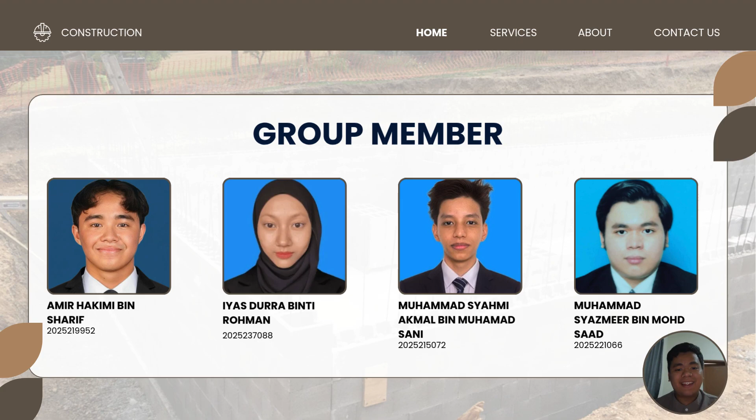Throughout this presentation, each member will present different sections of the report, including the project background, case study analysis, comparative analysis, and the key findings and recommendations.

Before we begin with the case studies, let us first understand the importance of basement construction in today's construction industry. Due to rapid urbanization and limited availability of land, basement construction has become an effective solution for maximizing land use, especially in densely developed areas.

By building below ground level, additional space can be created for parking, plant rooms, storage, and other building services without increasing the building footprint. However, basement construction is more complex than conventional construction. It requires careful planning, deep excavation, effective retaining structures, and proper groundwater control to ensure the safety and stability of excavation, hence improving the overall construction of the basement.

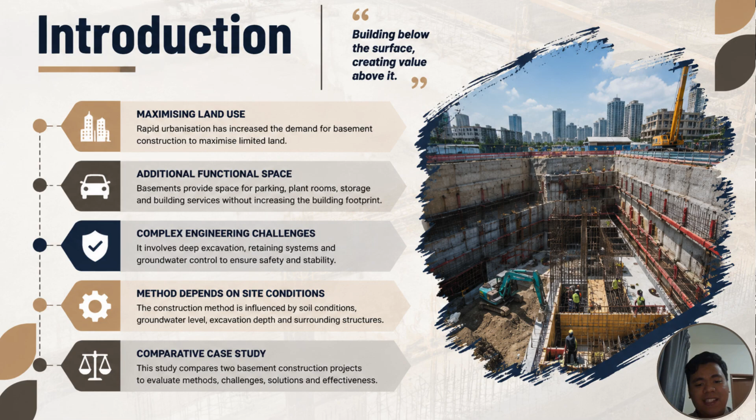Since every project has a different soil condition, groundwater level, surrounding environment, and selection of construction method, the choice of construction method must be based on the site-specific condition. Therefore, in this case study, we compare two different basement construction projects to evaluate their construction methods, engineering challenges, solutions, and overall effectiveness in achieving safe and efficient basement construction.

Now let's move on to the next part. Let's have a look at the project background of the chosen project. Let's dive into our first project breakdown of our selected case study.

The first selected project is the construction of one unit of a two-story detached bungalow with a basement, located at Lot 1823 Jalan Pegoh, Kampung Pegoh, Mukim Pegoh, Alor Gajah, Melaka. This project is designed as a modern luxury residential development consisting of one basement, a ground floor, and first floor, with a total gross floor area of approximately 3,196 square meters.

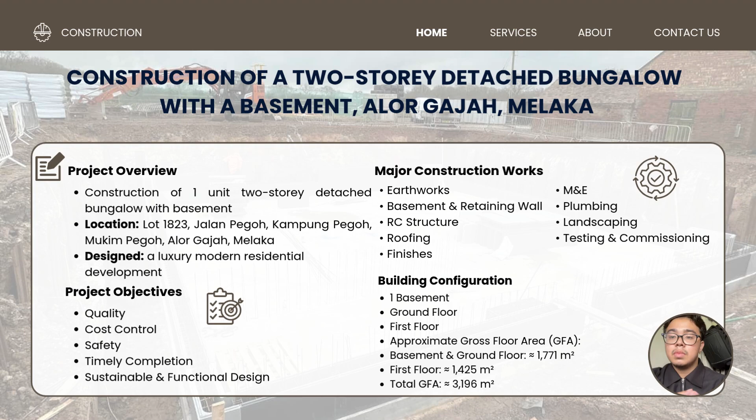The major construction works include earthwork, basement and retaining wall construction, reinforced concrete structural work, roofing, architecture, finishing, mechanical and electrical services, plumbing, landscape, and lastly testing and commissioning. The main objectives of this project are to achieve construction quality, effective cost control, workplace safety, timely project completion, and a sustainable and functional building design for our environment.

Next, I will briefly explain the parties involved in this project. Firstly, the owner, the client Dato Hashim Ghani, is responsible for initiating the project, approving the design, providing the financing, and making key project decisions.

Next, the architect, Azri Design Architect, prepares the architectural design, coordinates consultants, and ensures design compliance throughout construction. The quantity surveyor, ARR QS Consultancy Sdn Bhd, manages the project cost, prepares the contract documentation, and controls the project budget. Finally, the main contractor is Fuma Building and Engineering Sdn Bhd.

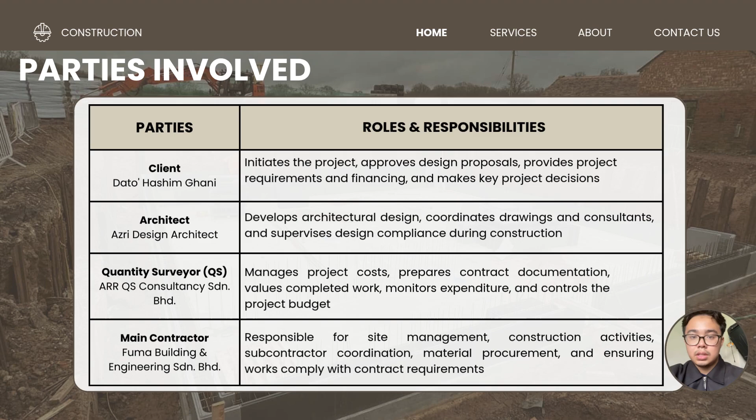They are responsible for managing the construction activity, supervising subcontractors, procuring material, and ensuring that all work complies with the contract requirements.

Now I will explain about the basement construction of Colony by Infinitum. It's a mixed-use development located in Chow Kit, Kuala Lumpur, near the Central Business District. The project was developed by Macly Equity Sdn Bhd in collaboration with Roxy Pacific Holding Limited.

It was constructed between 2015 to 2021. It consists of a 56-story tower with 723 residential units and 31 commercial units. One of the key features of this development is the 4-story basement.

The site is located in a highly urbanized area surrounded by existing buildings, commercial development, and major roads. Because of this, the construction process requires careful planning to minimize disturbance to the surrounding environment.

One of the major engineering challenges of this project was the geological condition of the site. The area is underlain by Kuala Lumpur limestone, also known as karst formation, which has irregular rock surfaces, underground cavities, and fractured bedrock. This condition made excavation and temporary retaining work more difficult compared to normal soil conditions.

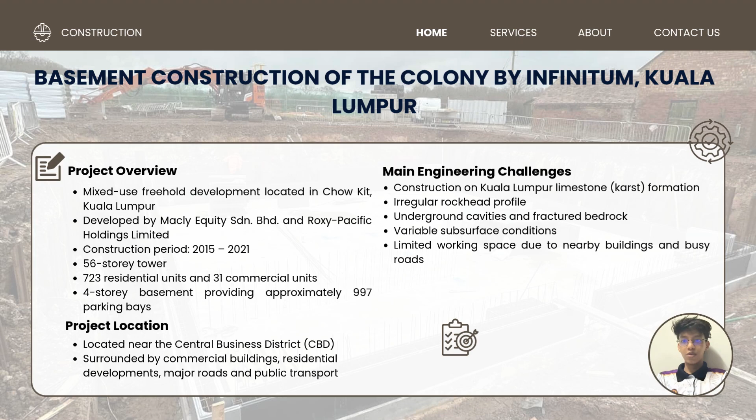In addition, the tight urban setting increased the complexity of the project, as the structure had to ensure the stability of the excavation and prevent ground movement that could affect the nearby structures.

Next, this slide explains the main parties involved in the construction of Colony by Infinitum basement project and their responsibilities. The client for this project is Macly Equity Sdn Bhd. They were responsible for project financing, defining the project objectives, appointing consultants and the main contractor, approving design proposals, and making key decisions regarding scope, cost, and program.

The main contractor is Prestij Mega Construction Sdn Bhd. They were responsible for managing the overall construction work on site, coordinating the subcontractors, and ensuring that all work was carried out according to the approved drawings.

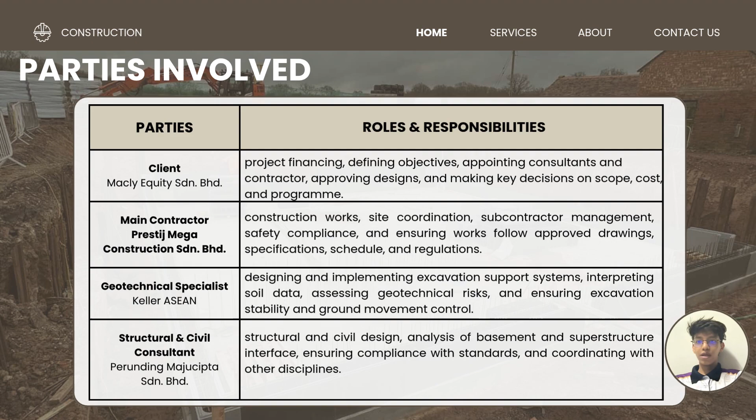Next is the geotechnical specialist, Keller ASEAN, responsible for designing and implementing the excavation support system, soil investigation, and ensuring the stability of the excavation work. After that, the structural and civil consultant was Perunding Majucipta Sdn Bhd, responsible for the structural and civil design, particularly the interface between the basement and superstructure. Overall, these parties worked together to ensure the project was delivered safely, efficiently, and in accordance with design and regulation requirements. Now I will continue with section 4, the case study analysis of our selected project.

Firstly, let's look at the design consideration. The building design was influenced by several important factors, including financial, space planning, structural requirement, site condition, and environmental performance, and compliance with Malaysian building regulations. Since the project includes a basement, the structural design used a reinforced concrete system to provide sufficient strength and stability. In addition, the hilly terrain and rural location require careful earthwork planning, drainage design, and construction logistics to ensure the building could be constructed safely and efficiently.

Let's continue with the basement construction method. This project adopted the open cut excavation method, which is suitable because the site has sufficient working space and relatively stable soil condition.

The construction begins with site clearing and site setting out, followed by soil stripping to remove unstable topsoil. Excavation is then carried out progressively in stages until the required basement level is achieved. To maintain excavation stability, batter slopes formed based on soil condition and continuous inspection are carried out throughout the excavation process. Instead of using a full internal strutting system, this project relies on batter slope for stability. However, temporary support such as steel sheet pile or timber planking are provided in localized areas whenever additional support is required.

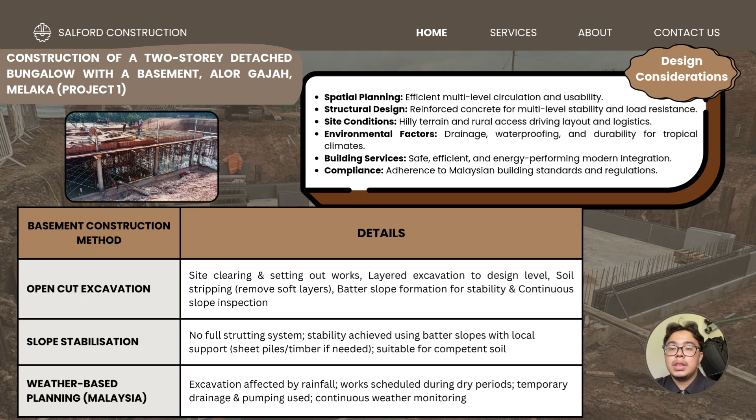Moving on to material use, the main structural material is reinforced concrete, used for the basement slab and retaining wall due to its high strength and durability against earth pressure. A waterproofing system is also installed to prevent water leaking and protect the basement from moisture damage.

During excavation, timber and steel supports are used temporarily whenever additional lateral support is required. For construction equipment and machinery, excavators are used for earthwork and material handling, while a hydraulic piling machine is selected because it produces less noise and vibration compared to conventional piling methods. A water pumping system is also used to control water inside the excavation area, ensuring a dry and stable working platform throughout the construction process.

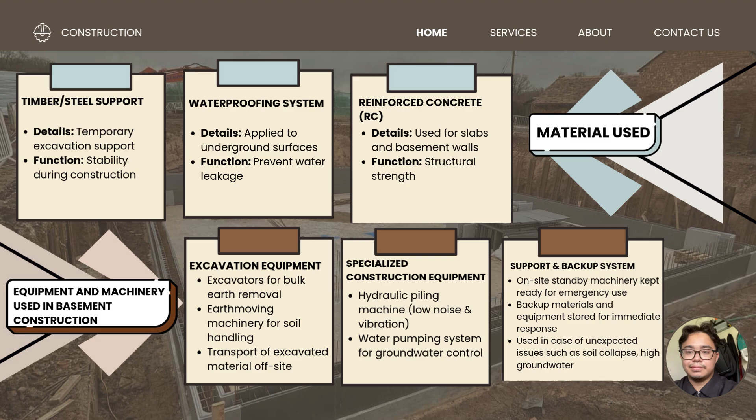Next, I will explain the testing, inspection, effectiveness, and cost involved in the basement construction. To ensure construction quality and safety, daily surveys are carried out to monitor ground movement and excavation level. Nearby buildings are also inspected regularly to detect any settlement or cracking, while all excavation work is supervised by the site supervisor and safety officer to ensure compliance with engineering and safety standards.

The open cut excavation method is considered effective. Why? Because it is cost efficient, requires fewer temporary support systems, and allows construction to progress more efficiently. In addition, proper weather planning also helps minimize delay caused by heavy rainfall typical of Malaysian weather.

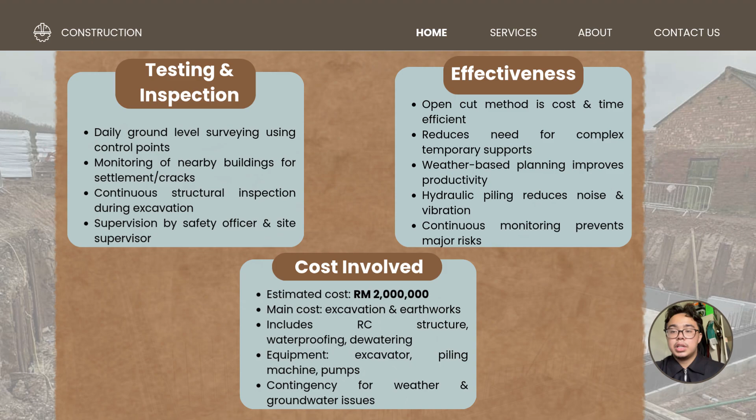The estimated cost for basement construction is approximately 2 million ringgit, covering excavation work, reinforced concrete structure, waterproofing, dewatering system, construction equipment, and contingency costs for unforeseen site conditions. Overall, this method provides a safe, efficient, and economical solution for basement construction.

During construction, several challenges were encountered. The first issue was groundwater, which created wet working conditions and slowed excavation progress. Secondly, the hilly terrain required careful excavation sequencing to maintain batter slope stability. Finally, heavy rain caused surface runoff and water accumulation, affecting both excavation and concreting activities.

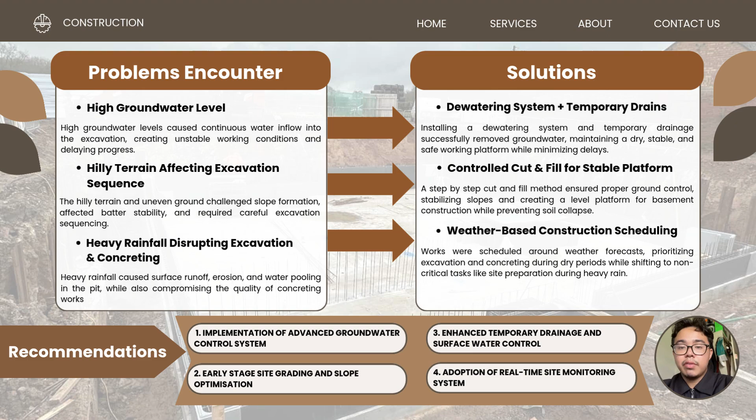To overcome these issues, the contractor installed a dewatering system and temporary drainage, applied controlled excavation to maintain slope stability, and scheduled critical activities during favorable weather conditions. For future improvement, we recommend implementing an advanced groundwater control system, improving temporary drainage, carrying out early stage slope optimization, and installing a real-time monitoring system to further enhance excavation safety and efficiency.

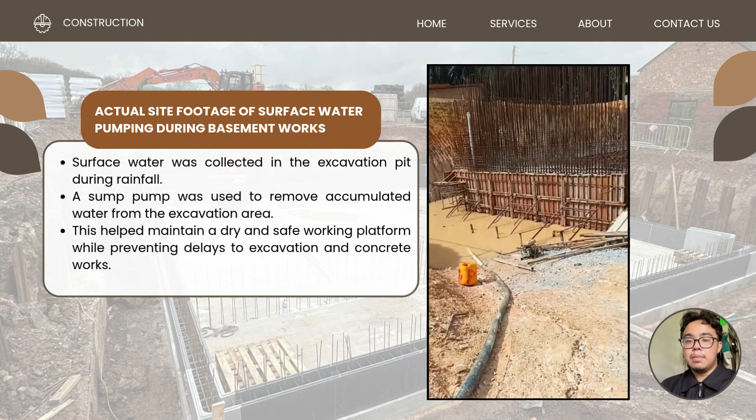Finally, we have prepared a video showing the actual surface water pumping operation during the basement excavation work on project 1. As shown in the footage, water collected inside the open cut excavation after rainfall. A pump was used to remove accumulated surface water and maintain a dry working platform. This process is important because it prevents water accumulation, improves site safety, protects excavation stability, and allows excavation and concrete work to continue with minimal delay.

For the design consideration of the Colony by Infinitum basement project, several key factors were taken into account. First, the complex geology where the soil condition is weak and unpredictable, which affects overall stability during excavation. Second is the influence of groundwater, which can reduce soil strength and compromise excavation safety by increasing instability and water ingress. Third is the urban constraint, as the site is surrounded by adjacent buildings and underground utilities, requiring strict control of ground movement.

Lastly, the deep excavation of the 4-story basement results in high lateral earth and water pressure, making stability even more critical. For the construction method, a contiguous bored pile wall is used as the main retaining system due to its high stiffness and low vibration, suitable for the urban environment.

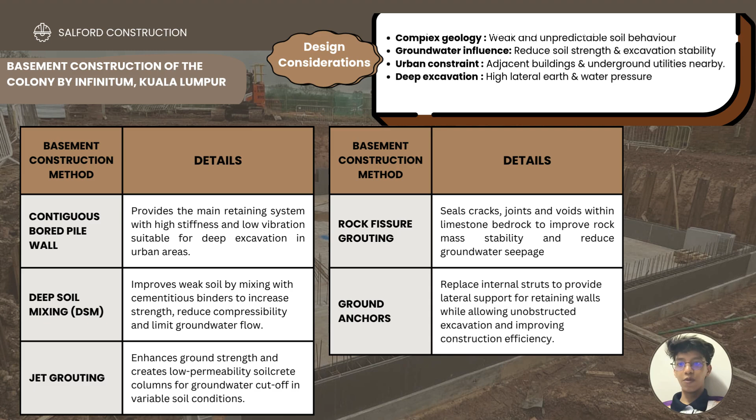Deep soil mixing is applied to improve the weak soil by increasing strength, reducing compressibility, and controlling groundwater flow. Jet grouting is used to enhance ground strength and form a low permeability soilcrete column for groundwater cut-off in variable soil conditions. Rock fissure grouting is used to seal cracks and voids within the limestone bedrock to improve rock stability and reduce seepage. Finally, ground anchors replace internal struts to provide lateral support while allowing an unobstructed excavation area and improving construction efficiency.

For the materials used in the basement construction, they can be divided into three categories. First is structural material, which includes reinforced concrete for the main structural elements and high strength reinforcement bars to provide load resistance and overall structural stability. Second is grouting and soil improvement material, which includes concrete and grouting works as well as cement grout.

Cement grout is used for void filling and improving ground condition, especially in weak soil zones. The third one is protection and durability material, which consists of waterproofing membranes to prevent water ingress into the basement structure, and corrosion protection systems for permanent anchors to ensure long-term durability in underground conditions.

For the equipment and machinery used, they are also grouped into three categories. The first is excavation equipment, including the rotary bored piling rig for deep foundation work and hydraulic crawler drilling rigs for excavation and drilling activities.

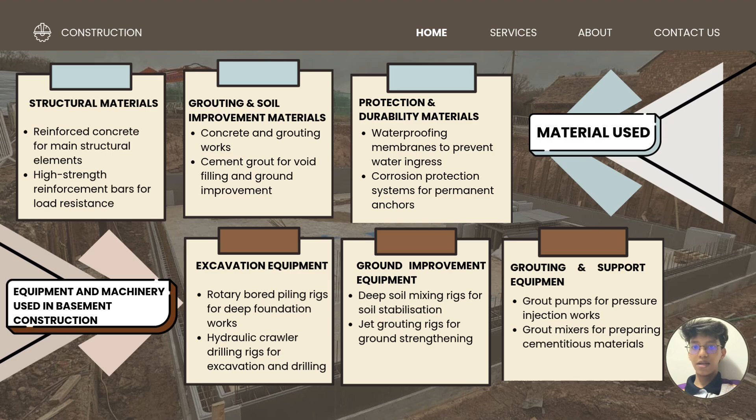Ground improvement equipment consists of the deep soil mixing rig for soil stabilization and jet grouting rigs for strengthening the ground. Lastly, grouting and support equipment, including the grout pump for pressure injection works and the grout mixer for preparing cementitious material, ensuring precise execution and quality control during basement construction.

I will continue this presentation with the testing, inspection, effectiveness, and last but not least, construction cost involved in the construction of the Colony by Infinitum, Kuala Lumpur.

Starting with testing and inspection, continuous testing and monitoring were carried out throughout the entire construction period to ensure the excavation remains safe and stable. Various tests were conducted to evaluate the soil condition, concrete quality, and pile performance, while groundwater level, ground settlement, and retaining wall movement were continuously monitored so that any potential issues could be identified and addressed at an early stage.

Moving on to effectiveness, the integrated retaining system proved highly successful in dealing with the challenges of limestone ground conditions and the geology of the site. The use of contiguous bored piles, deep soil mixing, jet grouting, and rock fissure grouting provided strong excavation support, controlled groundwater effectively, and improved both safety and construction efficiency.

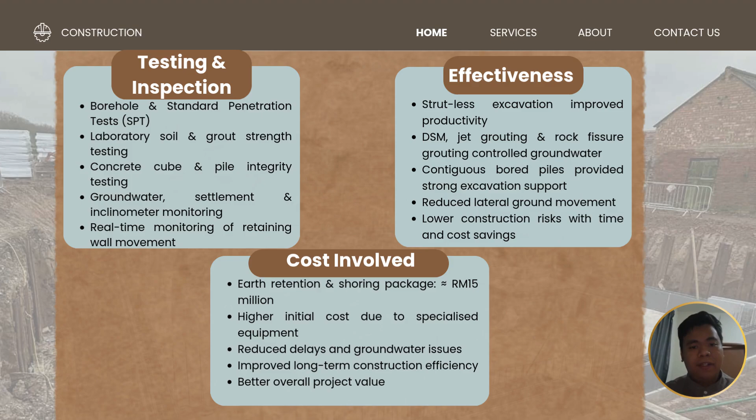Finally, for the cost of the project, the earth retaining and shoring works were valued at approximately RM 15 million. Although the initial investment was relatively high due to the specialized equipment and advanced construction techniques, it helped reduce construction risk, minimize delays, and improve overall project efficiency. This ensured the investment was worth the money and resulted in better performance of the basement construction.

Now I shall continue with the main problems encountered during the basement construction and the solutions implemented to overcome them. The first challenge was the high groundwater level. Continuous groundwater inflow created unstable working conditions and slowed down the excavation process. To solve this, a dewatering system and temporary drainage were installed to keep the excavation dry, safe, and suitable for construction activities.

The second challenge was the hilly terrain, which made it difficult to maintain stable excavation slopes and required careful planning of excavation sequences. This was solved by using a controlled cut and fill method, allowing the site to be excavated in stages while creating a stable working platform for safety.

The third challenge was heavy rainfall, which caused surface runoff, water ponding, and affected the quality of concrete works. To minimize this impact, the construction schedule was planned according to the weather forecast. Excavation and concreting were carried out during dry periods, while non-critical activities were performed during rainy weather.

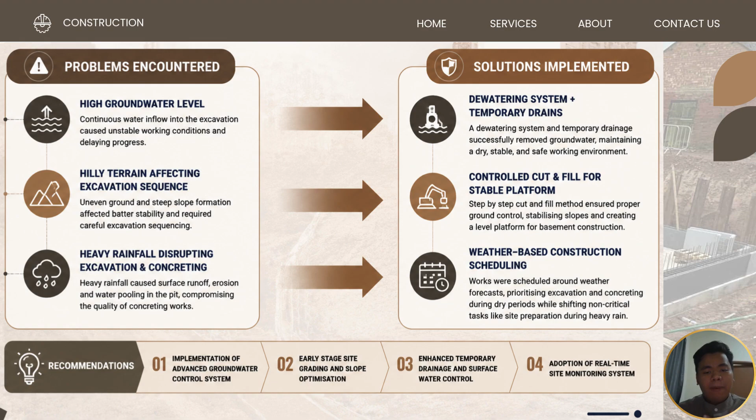Based on these challenges, several recommendations are proposed for future projects. This includes implementing a more advanced groundwater control system, carrying out early site grading and slope optimization, improving temporary drainage and surface water management, and adopting a real-time monitoring system to detect potential problems at an early stage. Overall, these solutions and recommendations help improve construction safety, minimize delays, and ensure the successful completion of the basement works.

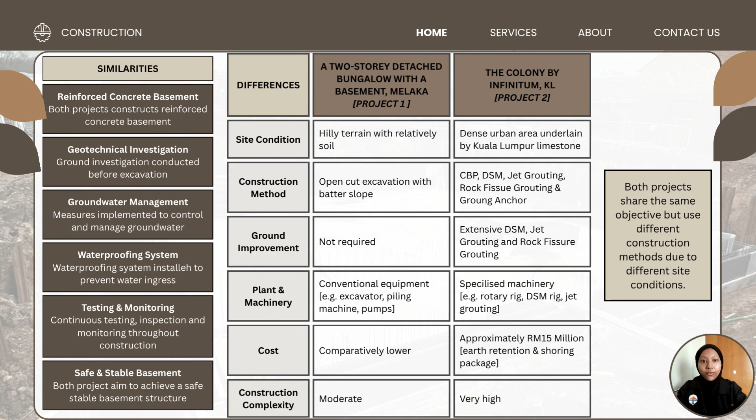In addition, both projects implemented groundwater management, waterproofing system, and continuous testing and monitoring throughout construction to ensure excavation stability and structural safety. However, there were also several important differences. Project 1 was constructed on relatively competent soil with a slightly hilly terrain, while Project 2 was located in a dense urban area underlain by Kuala Lumpur limestone, which presented much more challenging geological conditions. These different site conditions influence the construction method, equipment, construction complexity, and overall project cost. Overall, although both projects had the same construction objective, they adopted different engineering approaches to suit their respective site conditions.

Now let's look at why different construction methods were selected for these two projects. As shown in the diagram, the selection of basement construction method was mainly influenced by the site condition. For Project 1, the site consisted of relatively competent soil with sufficient working space. Therefore, the open cut excavation method was selected because it was practical, economical, and suitable for the ground condition. The construction process was supported by temporary drainage system, groundwater pumping, and limited temporary retaining structure. This resulted in lower construction costs and reduced technical complexity while still achieving good construction performance.

On the other hand, Project 2 was built on limestone geology within a dense urban environment. Due to irregular rock formation, groundwater seepage, and nearby buildings, the project required a more advanced engineering solution. Therefore, contiguous bored pile walls, deep soil mixing, jet grouting, rock fissure grouting, and ground anchor were adopted to improve excavation stability, control groundwater, and minimize ground movement. Although this approach involved a higher initial investment, it provides better structural stability, improved groundwater control, and greater protection to the surrounding structure. This comparison clearly shows that there is no single construction method suitable for every basement project. Instead, the construction method should always be selected based on the geological condition, groundwater behavior, surrounding environment, and project requirement.

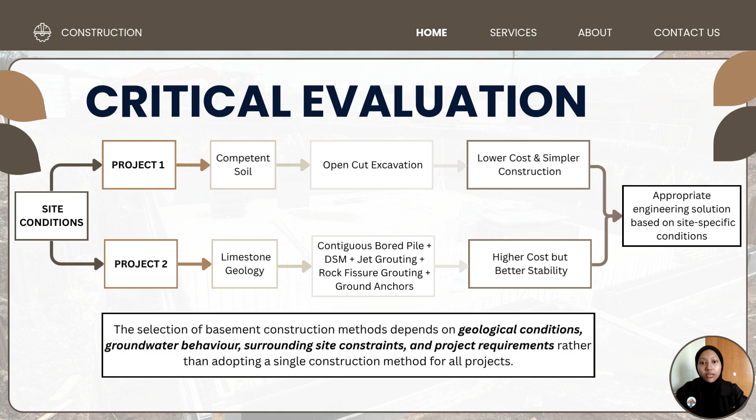Finally, I would like to summarize the key findings and recommendations for this comparative study. The first key finding is that site condition is the most important factor when selecting a basement construction method. The second finding is that effective groundwater management is essential to maintain excavation stability and ensure safe construction activities. The study also shows that continuous testing, inspection, and monitoring are important for maintaining construction quality and reducing project risk. Finally, although advanced retaining systems require a higher initial investment, they provide better long-term performance, especially for projects with difficult geological conditions. Based on this finding, several recommendations can be made.

For future basement construction projects, firstly, detailed geotechnical investigation should always be carried out before construction begins. Secondly, groundwater management systems should be continuously improved to minimize excavation risk. The adoption of building information modeling, known as BIM, together with digital monitoring technologies, should also be encouraged to improve planning and project coordination. Lastly, construction methods should always be selected according to the site's geological condition while maintaining comprehensive testing and monitoring throughout the construction process.

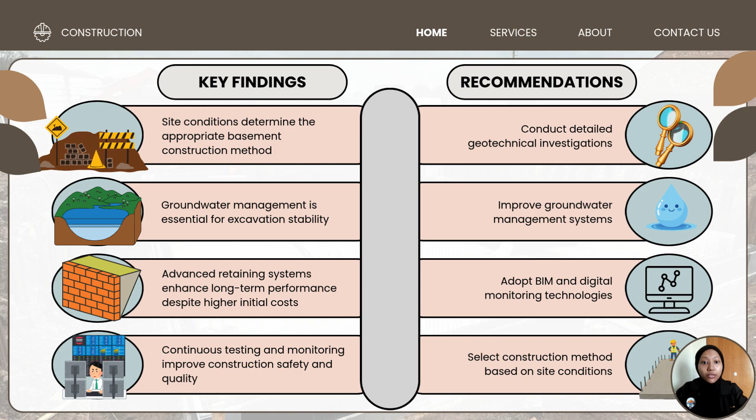In conclusion, this comparative study demonstrates that successful basement construction depends on selecting engineering solutions more suitable for the specific site condition rather than applying a single construction method to every project. This study has shown that basement construction is a complex process which requires careful planning, appropriate engineering design, and effective construction control. Through the comparison of the two case studies we used, we found that there is no single construction method suitable for every project.

Instead, the most appropriate method should always be selected based on the project site condition, including the soil characteristics, groundwater level, excavation depth, and the surrounding environment. Both case studies also demonstrate that proper excavation technique, retaining system, and groundwater control are essential to achieve a stable and safe basement structure. In addition, good planning and monitoring of effective risk management play an important role in construction safety and enhance the overall performance.

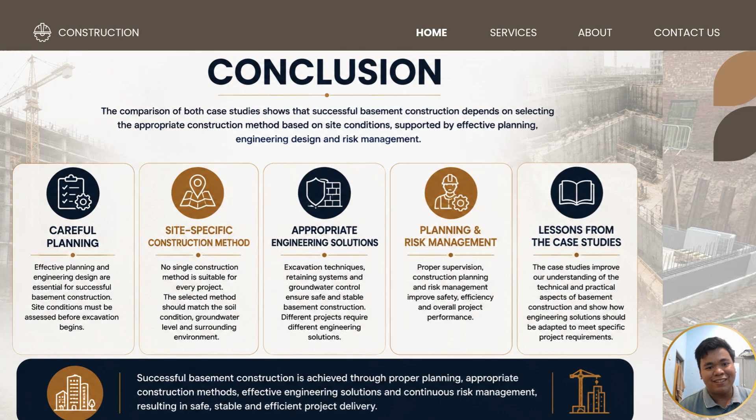Overall, this assignment has enhanced our understanding and the practical aspect of basement construction, and highlighted the importance of selecting engineering solutions that best suit the requirements of each project.